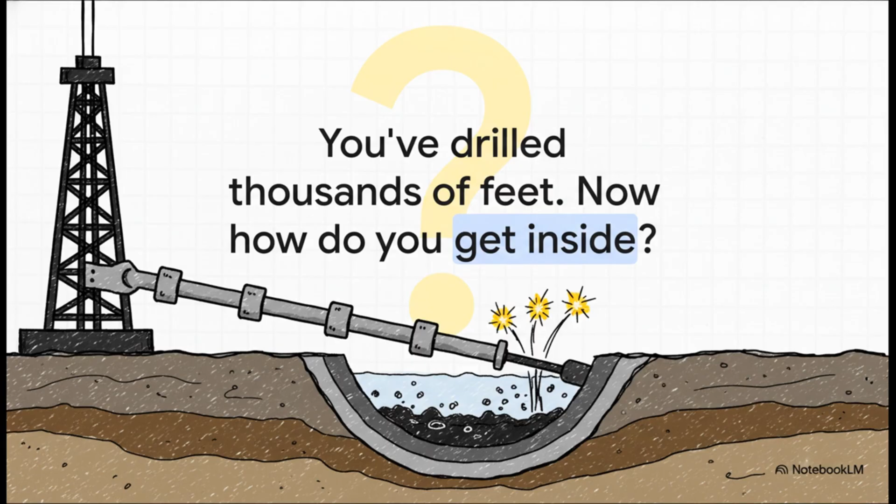So to really get what perforating is all about, you first have to understand the massive challenge it was designed to solve. You can think of it as the billion-dollar puncture problem. Okay, imagine this. You've just spent millions, maybe tens of millions of dollars, drilling a well that goes thousands of feet into the earth. You've hit the jackpot, a reservoir of oil or gas. You are right there. But here's the catch. You're completely sealed off from it by solid steel and cement. So the big question is, how do you open the door?

See, a modern well isn't just an open hole in the ground. It's heavily fortified. For safety and stability, it's lined with this thick steel pipe called a casing, and then that casing is cemented into place. What you end up with is a totally sealed tube, which is great for control, but it also completely isolates you from the very rock you're trying to get into.

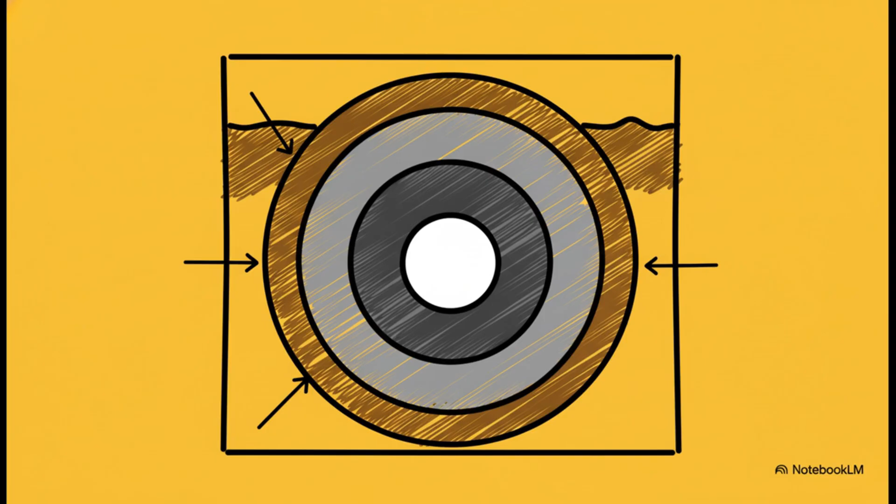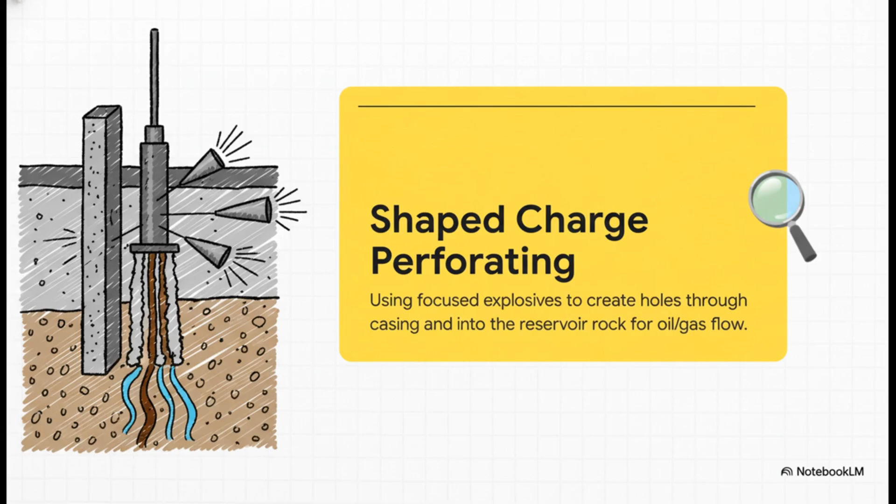The solution is both ingenious and incredibly powerful. It's called shaped charge perforating. This is where engineers use these very precisely designed explosives to blast clean, deep tunnels right through that steel and cement. It creates a perfect, direct pathway for oil and gas to finally flow from the rock and into the well. But a technology this advanced doesn't just pop up overnight.

In the early days, engineers were stuck with a pretty big dilemma. They had two competing methods, and honestly, each one had some serious downsides. So on one hand, you had through tubing perforating. For this, you could lower these small explosive guns down on a simple cable. It was pretty flexible, sure, but you could only perforate short little sections at a time.

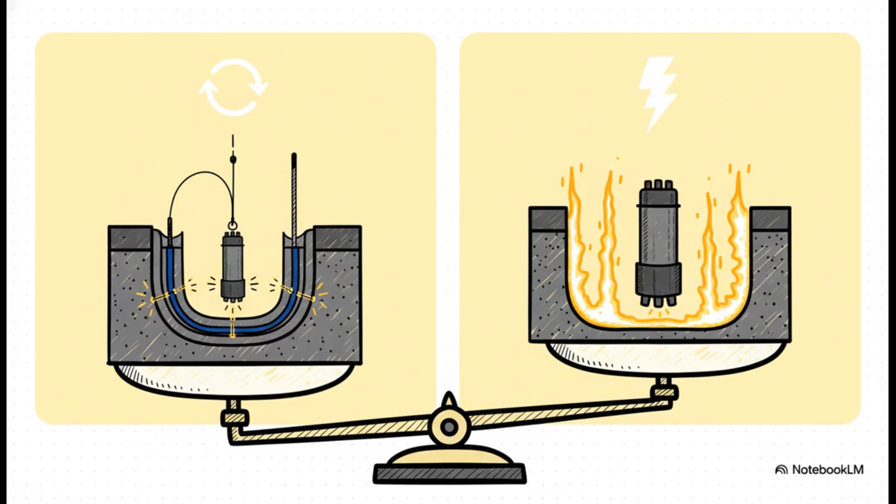On the other hand, you had casing guns. Now these things were big and powerful, but the catch was you had to use them before you put the main production pipe in, which was a huge pain and super inefficient. So you had to choose. Did you want flexibility or did you want power? You couldn't have both. And this really just nails it, doesn't it? This was the problem everyone was trying to solve.

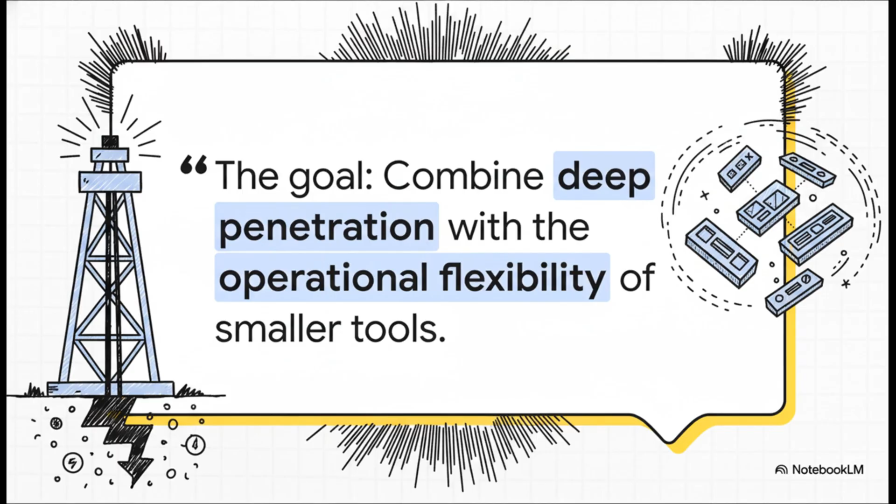The industry was desperate for a breakthrough, some way to get the best of both worlds. They needed the power of those big guns, but with the smart, flexible operations of the smaller systems. And that breakthrough finally came. It was called Tubing Conveyed Perforating, or TCP for short. And this system was just brilliant. It elegantly solved that old problem by combining the strengths of both methods into one super effective package.

TCP brought some huge advantages to the table. First, you could finally use those large, powerful guns after the main production pipe was already in the well. This meant you could perforate thousands of feet in just one single trip.

Second, it allowed for something called underbalanced firing. This is so cool. Basically, you intentionally lower the pressure inside the well right before you detonate. The moment those charges fire, the higher pressure from the surrounding rock acts like a power washer, instantly blasting all the debris out of the brand new tunnels. The system literally cleans itself.

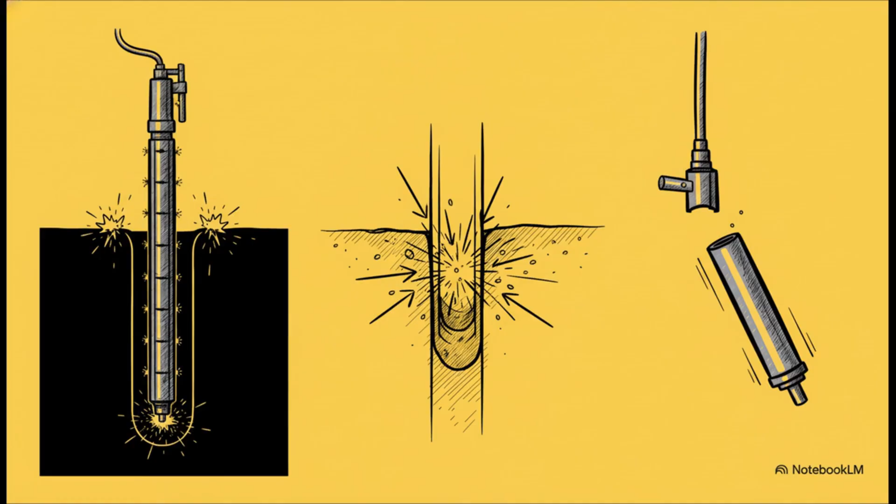It's an amazing design. Of course, having all these powerful explosives thousands of feet underground brings up a pretty important question. How in the world do you set them off safely and at the exact right moment? Well, this is where the real magic of the technology comes in, the firing heads.

Let's take a look at one type, the hydraulic delay firing head. You can think of it like a very sophisticated high-pressure kitchen timer. Up on the surface, engineers increase the pressure inside the pipe. That pressure snaps a specific set of pins inside the tool, which starts a countdown. This delay gives them just enough time to get the well pressure exactly right for that perfect underbalanced condition, and then, boom, the gun fires right on schedule.

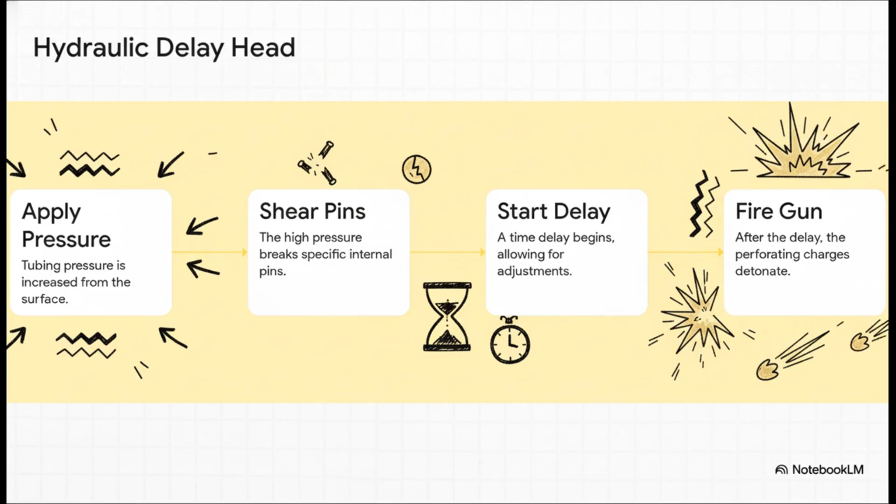Another really clever design is the differential pressure head. This one doesn't just fire because of high pressure alone. No, it only activates when it detects a very specific difference in pressure between the inside of the pipe and the outside. You can really see how focused they are on safety here. It even has a spring that physically locks the whole mechanism if the overall pressures are too low, which helps prevent it from ever going off by accident.

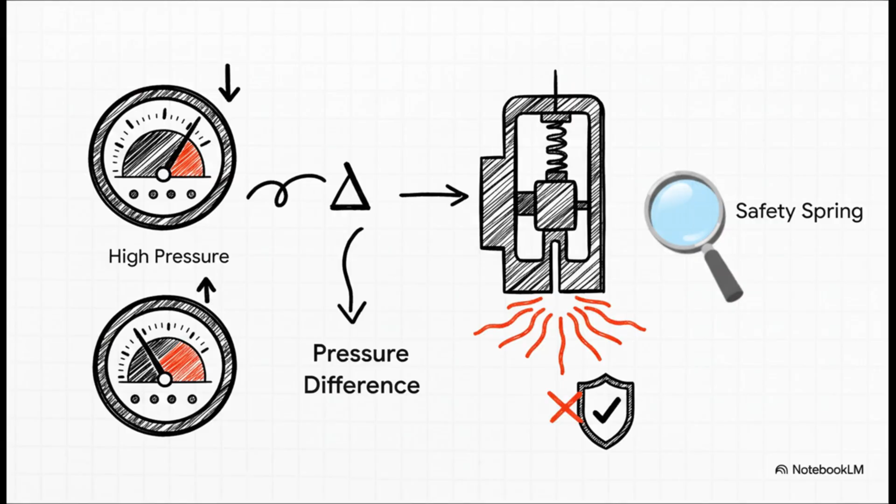But if you want to talk about the absolute safest system out there, it has to be the trigger charge firing system. With this method, the main gun assembly goes into the well without its primary detonator. It's completely inert. Only when everything is perfectly in place, just moments before they're ready to fire, do they run a small trigger charge down on the wireline and plug it in. It's like only putting the firing pin into a device at the very last second. It just dramatically cuts down the risk.

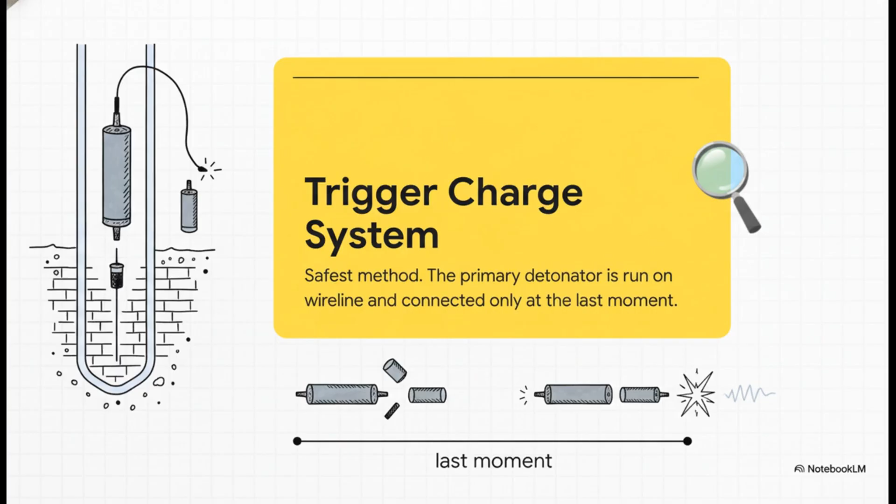So we've walked through the problem, the evolution of the solutions, and the details of the technology. But let's pull back for a second. Why does all of this really matter? What kind of impact has tubing conveyed perforating actually had on the world?

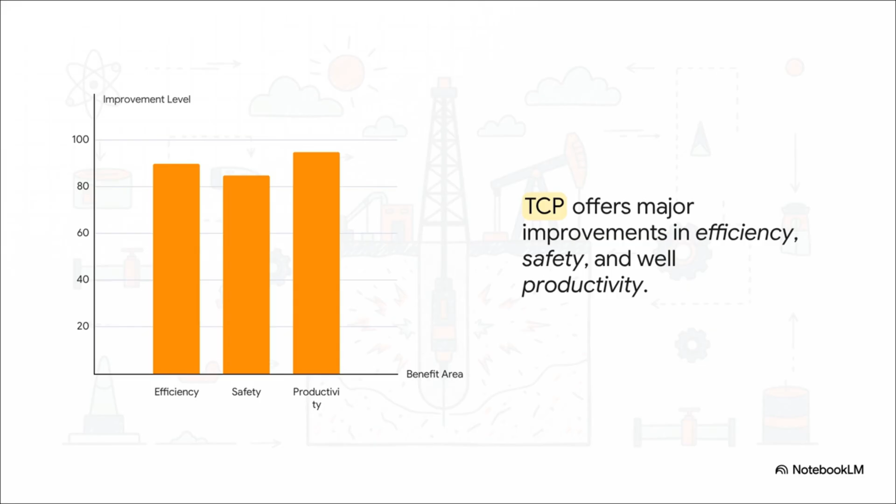Well, the impact has been absolutely massive. Efficiency went through the roof because you could suddenly do way more work in a lot less time. Safety improved dramatically thanks to these advanced multi-step triggers. And most importantly, the productivity of the wells shot up because those cleaner, deeper tunnels created by TCP just allowed for a much better flow of oil and gas.

And if you want to boil it all down, it really comes down to the number one, a single run. What used to take days and multiple trips in and out of the well could now be done in one single, efficient go. In an industry where one day of rig time can cost hundreds of thousands of dollars, that kind of efficiency isn't just an improvement, it's a total game changer.

So, the next time you flip a light switch or fill up your car, just take a second to remember this incredible, invisible technology at work, miles beneath our feet. It kind of makes you wonder, right? What other complex feats of engineering, hidden just out of sight, are we all taking for granted every single day?